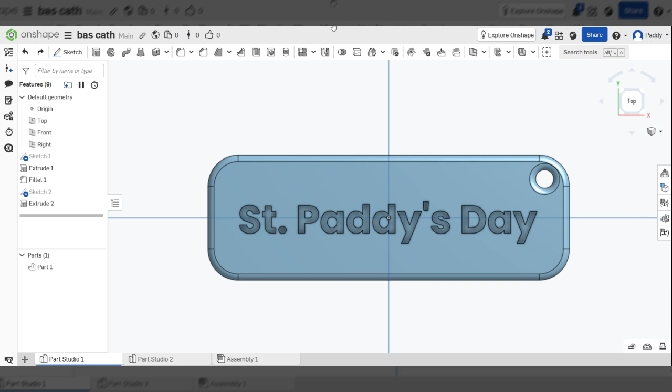So first thing you're going to do is jump into a new part studio, and you're going to look at probably the front plane. It doesn't really matter, but what I'm going to do is orient myself to the front plane by pressing N. And then I'm going to make a sketch there.

And I'm going to set the center point rectangle and make a rectangle around my origin. You don't need to do this, but it is good practice and it does help us in lots of models.

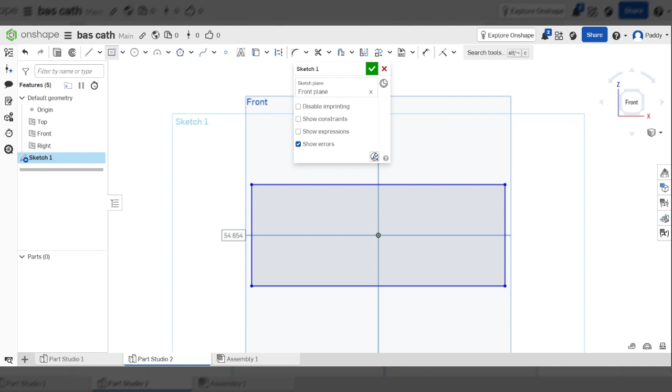Now you will see that this box at the bottom, the dimension is currently highlighted. That means if I just type a number in, it will start typing into that dimension. And when you see, when I press enter, that highlighted box flips to the side and I can again set my height. So I've got currently a rectangle that's 60 by 20, which is what I think is an appropriate height and length for a keychain.

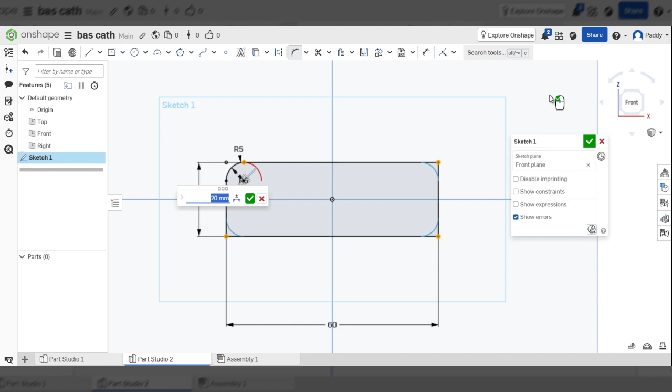All I'm going to do now is put a fillet on the four corners. It defaults to 5mm, I think 5mm is fine. Once you've got those 5mm there, I'm just going to click away and it should implement those fillets onto the corners.

Last thing I'm going to do before I extrude it is I'm going to put the hole that the keychain is going to go through towards one of the edges, and I'm going to make that hole 3mm.

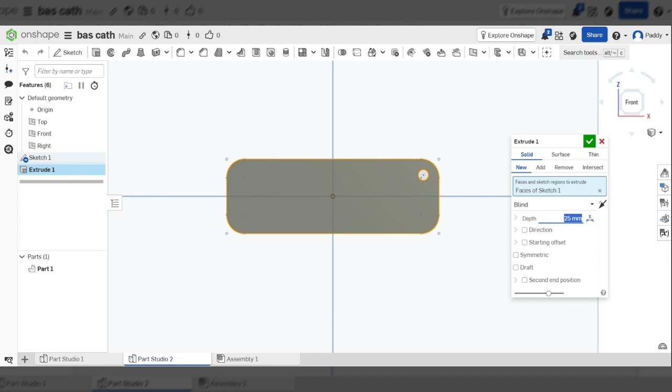And now I'm ready to extrude. I'm going to click my extrude tool. It's going to default to 25. I'm going to extrude it by 3. You should see it should extrude everything except that hole that we put in, or any other shape that you've chosen to put in there.

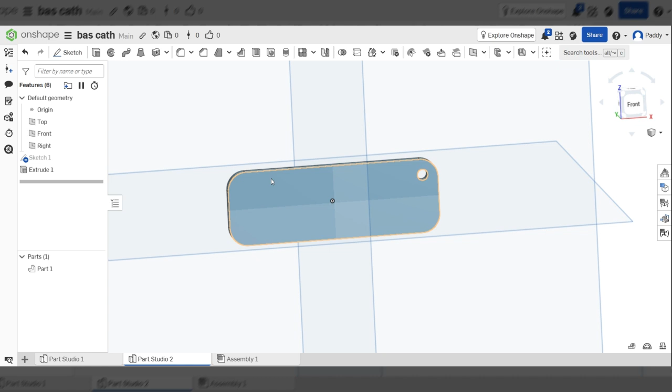All I'm going to do now, and this will matter if you're 3D printing it. You don't want to do this if you're laser cutting it, because when you're laser cutting it, you're dealing with DXFs and drawings, that's single plane or 2D faces. But what I'm going to do, just in case you want to 3D print this, is I'm going to put a fillet in, a 1mm fillet on the front and back, just to make that transition a lot easier.

Now we're ready to start our text. What you're going to do is make sure you're looking right at the front plane or whatever plane you've drawn it on, and you're going to start a sketch on the top face that we've just made.

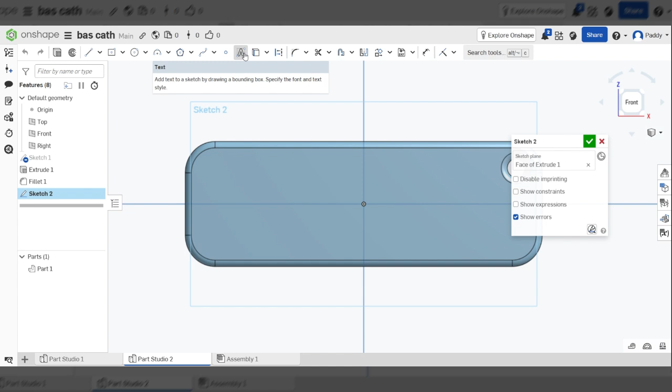So I'm going to click sketch, and all I want to do at the minute is put some text in. So I go all along my sketch bar to this A, you hover over it, you'll see that it says text. Now text works a little bit differently to what you might be used to if you've been working in Microsoft suites or Adobe.

The way it works is we write something and then we can edit it. There's no font size, we just need to edit the size of whatever text we've made.

So if, for example, I select the text, what I need to do to start with is probably, you don't want it snapping anywhere, but you probably want to start in a free spot. You just want to draw a rectangle out where you want that text to be. And again, you probably don't want it snapping at this end either, you just want it free moving.

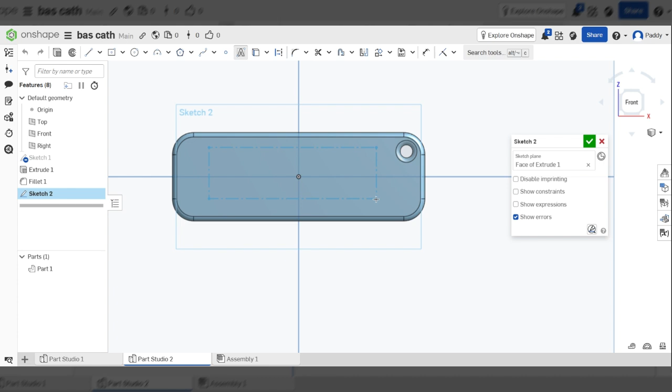And then you'll be asked to select some text. Now, it's just been St. Patrick's Day, so I'm going to write some St. Patrick's Day on it.

And you will see, if I highlight it, I've got a number of fonts. Now the annoying thing is you don't get a preview of the font without highlighting it. But if you do highlight and select it, you will see the preview comes up below it, so I can scroll through.

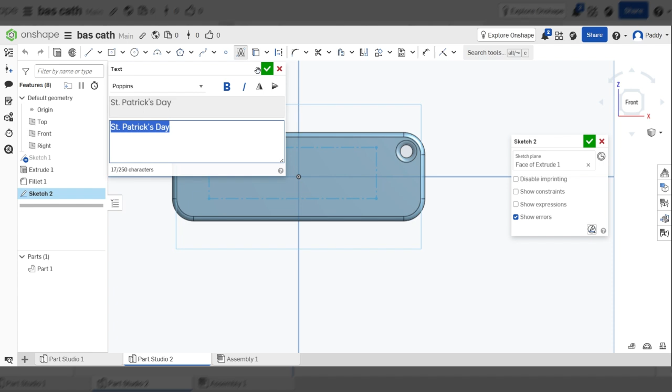See what they all look like. I'm going to click the Poppins, and then click the tick. What this does is set the height of the box I drew, and it scales all the letters to keep them in line with the height of the box, with certain over and underhangs, like the apostrophe going a bit above and the Y coming a bit below.

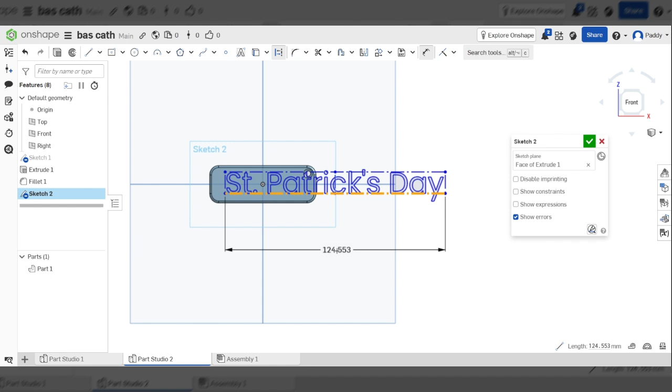So what I want to do is, I know I made this 60. I'm going to dimension the length to be 50, and this should again scale the height with it. So if I set that to 50, you'll see that's a much better size.

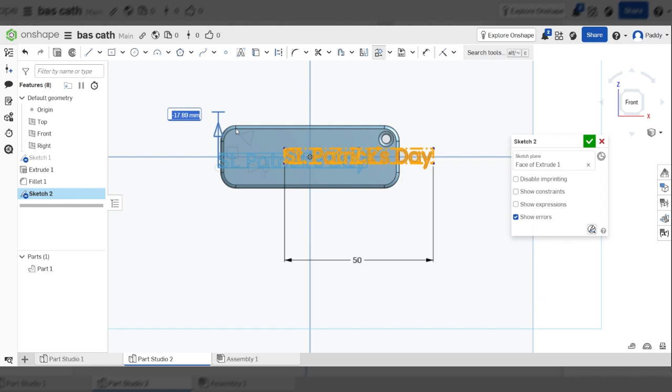What I can do is click my transform tool, that's in the linear and circular pattern there, drop down to transform, select everything, and I'll be left with these arrows. I can either free move, or use the arrows to drop down. I can even scale like this, and it will snap to the center point.

So I'm just going to arrange it to somewhere that looks appropriate. As soon as I'm happy with the placement, you'll get that green tick on the cursor. I just click away and you'll see it snaps to where I've placed it.

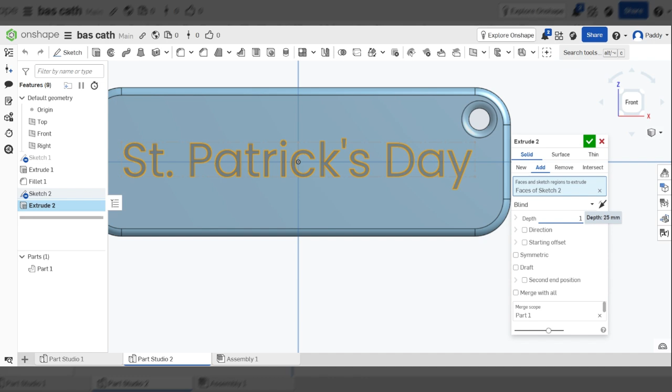The last thing I need to do now is go to extrude. We want to make this look like it's engraved, or you might want it embossed. If you want it embossed, you just extrude add by 1mm, and you'll see that pops up off the keyring, along with any other patterns or little shapes you might want to put in there manually.

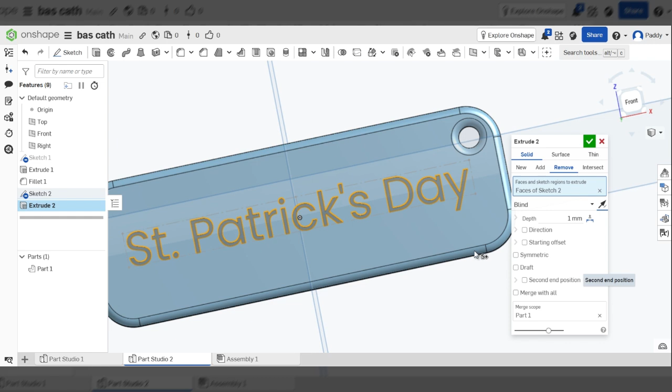If you want to engrave it, you're going to remove it by 1 mm. So exactly the same, you're just going to remove it by 1 mm, and that's not going to work. I don't know why that's not worked. There we go, it was just trying to extrude it the wrong way.

So if it does come up with a red line, just watch out which way you're extruding it with this arrow key, and if you do it downwards, it should cut into the plate. And there you've got your words, your letters engraved upon the keyring.

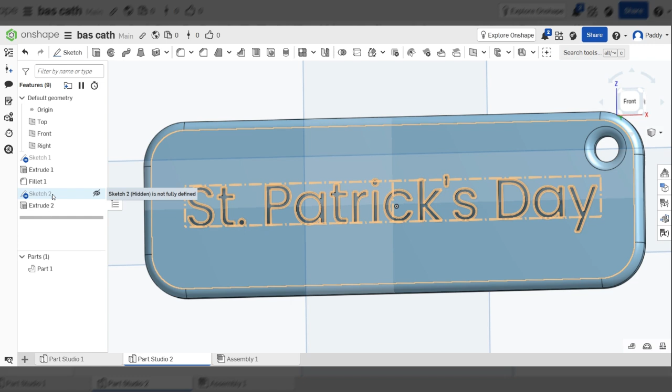Easy as that. Now, if you want to go back and edit the text, it's not as straightforward, but it's still pretty easy. You need to double click on the actual sketch that you did the text on, and when you double click on that, you'll see it goes blue and you'll get this writing back. If you right click on any segment of the text, you will get the option to edit the text.

From there, you can actually edit everything you could before. You can change the actual text. So, for example, we might want to put St. Paddy's Day instead of St. Patrick's Day. I can change the font.

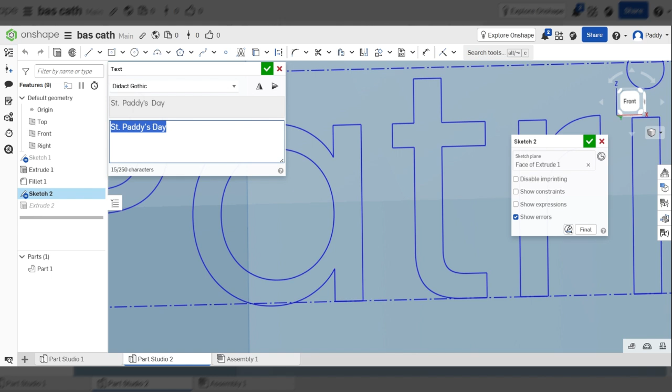Let's go with, that's not a very different one. There we go, click the tick. The one thing to be wary about with this is if you choose a really different font, it might scale weirdly. This one's kept concurrent, but if you chose a particularly tall font, you might see that extending above or towards the edge of the plate, because it won't scale lengthways since we've already defined that as 50.

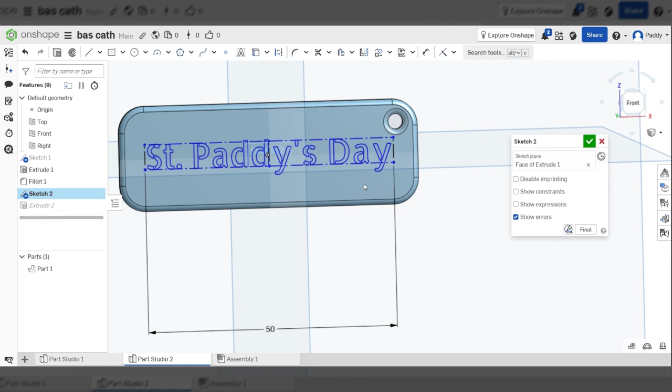So if you click the tick now with that, it should engrave it. It should put that engraved straight back in for you.

So hopefully you've enjoyed making this keychain. Again, we've mainly messed about with the text. What you can do is add your own shapes, your own patterns, your own pictures if you sketch around to that, and emboss or engrave them at different depths. You can make some really cool things. So let's see what we can make, and hopefully that's been useful to you.